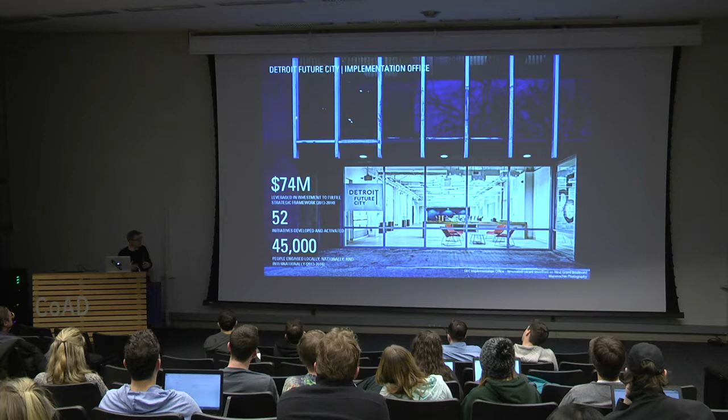I think for us, we have operating funding from the Kresge Foundation. We work hard with a number of other foundations, as I know some of you do, to garner additional funding to implement programs. But what we try to do is really step into the breach where you see challenges on the ground in Detroit, and the opportunities that are there for the city, and sometimes they don't necessarily connect, and we try to come into that point to connect them and to really catalyze things that might not otherwise happen.

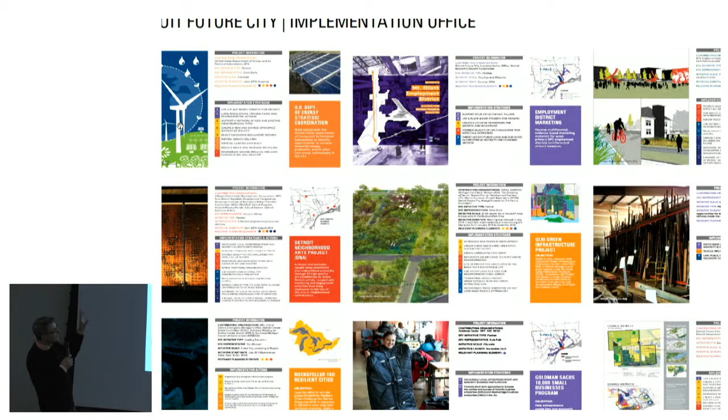We do that in a number of ways, and this is a little postage stamp of some of the initiatives we've done. They're different things - planning and pursuing EPA grants, coordination with the Department of Energy, economic development planning, working to bring in investors into Detroit to support groups. You recognize Veronika Scott here - a whole host of things that all stitch together.

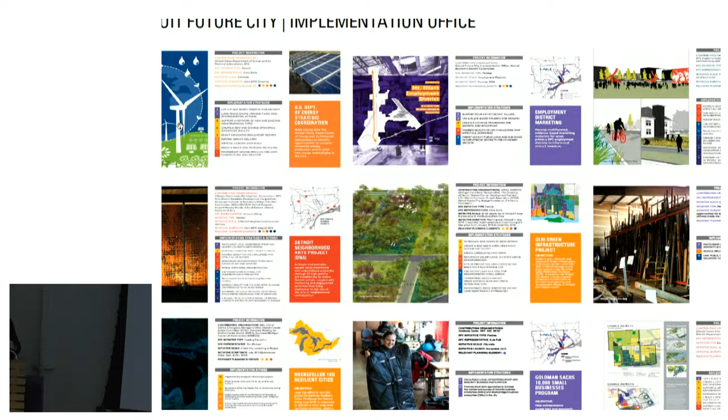And they sometimes step way out of bounds for what people think we should be doing, including ourselves sometimes. But I think our team is quite earnest in trying to move the city forward, and sometimes that means you make mistakes. I think we're learning along the way, and I feel very good about what we've been able to do. So before we go there, I'd like to back up.

Sometimes I go to places and present an entire slide deck that's all Detroit Future City, and when I leave, people think I'm a planner, which at some level is okay. But I think that distinction is troublesome for me, because as architects we've become somewhat set aside, procured for a very specific technical task, and that task is becoming increasingly specialized. I think it puts us in a position to have far less agency around the key issues impacting our lives and our cities.

I'm advocating for, and want to demonstrate in this presentation, perhaps not the most robust intellectual project, but one that is highly discursive and moves across different terrains and boundaries. You don't have to ask for permission to step into a space you normally wouldn't be in, you just go there. So some of the stuff I'm going to show you illustrates my background, which as an architect is doing buildings.

This was a building I did, actually the construction was completed right during the midpoint of Detroit Future City, so these two things were going simultaneously. For me that was exhilarating, that's what I absolutely love to do, having these very different things happening at one time. I think for a lot of people it's very troubling because they don't know what to make of you, and I find that fun.

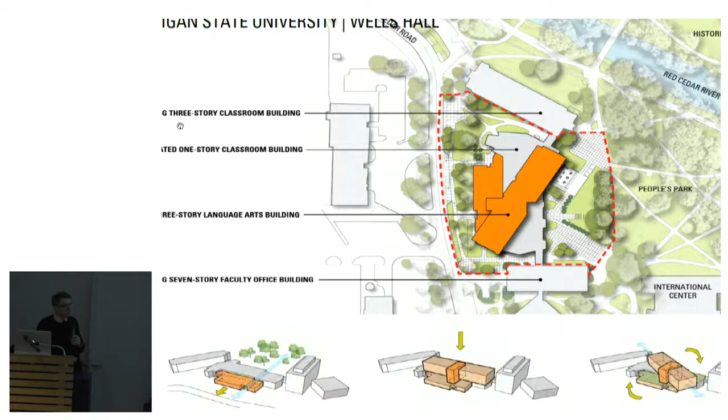None of these are intended to knock you down, but the idea is, we went through this process to do this building for Michigan State, a linguistics building for them. It was there to redefine a place called Wells Hall, a kind of Eastern Bloc looking building along Shaw Lane, the front door to the university facing the stadium. They really wanted to reposition it and introduce the university to people as they came through, so we had a whole host of different ways we approached it.

We ended up doing something the leadership wanted, which was essentially placing three additional floors across a series of lecture halls like these at a 31-degree angle, because it would be perpendicular to the northernmost building. For the leadership that was important, and we understood that. This is after about a year of figuring out exactly where all this stuff goes. It also preserved People's Park toward the east along the Red Cedar River.

When we did that, it meant this massive building, about 88,000 square feet above the lecture halls, needed support, so we had to come up with an innovative structural system because you couldn't put any columns in a sight line. Imagine that size building running across a building full of these rooms and not being able to block any of your views. This was a really huge challenge.

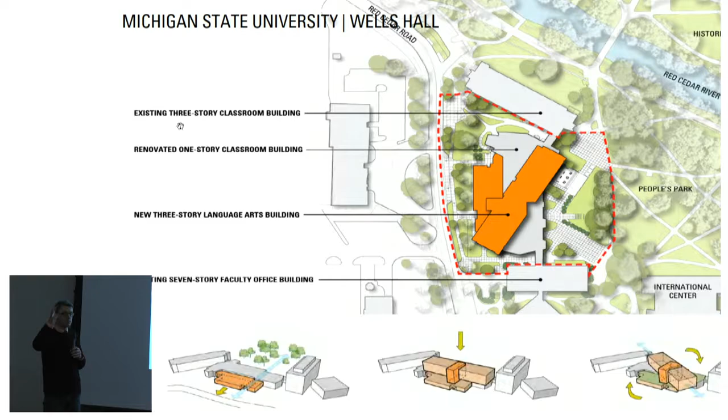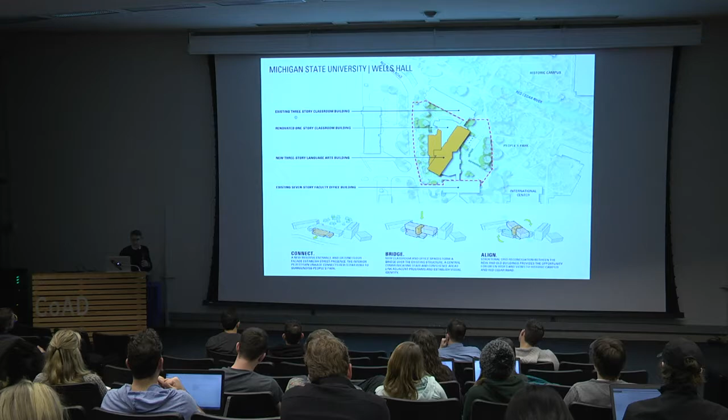We ended up developing a different braced frame system to do this. But the point I'm making here is not so much about how awesome the braced frame system was, but the fact that you can do that and help plan a city at the same time. There are ways to do this, and I think when you bring these things together, some pretty cool things can happen. So this is part of that framework, maybe in the earlier third of Detroit Future City.

The idea with this building was also a radical departure from the way the university had done their faculty offices in the past. It was all open seating because they were dealing with some really tough numbers in how to manage space, and we were shifting people. This was kind of like the last domino of a 25-set domino run across the university to move programming around, and this was the terminus point that allowed all those other things to happen.

This meant we were bringing faculty into the space, and I can tell you many were very, very frustrated at the fact they wouldn't have a private office anymore.

We went through meetings when we'd bring people in here, and we'd actually show them how the shades go up and down with the sun, and when you look out you see all over the Red Cedar River. Immediately when people saw that, they realized, whoa, this is incredible. Not only do I get to see outside to the river, but I can turn around and talk to my coworkers quite easily.

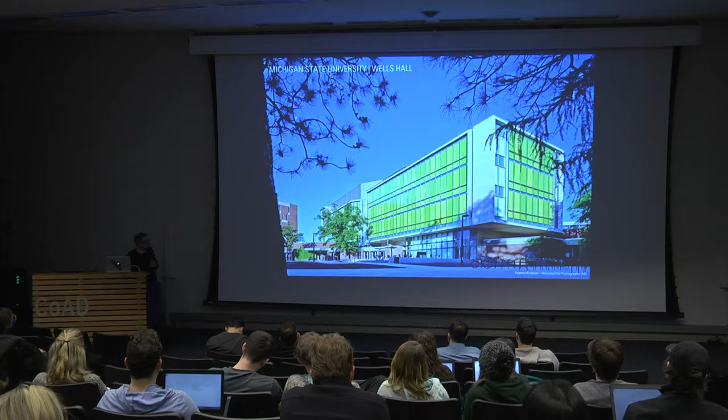What we're understanding now from post-occupancy studies is that the kind of communal atmosphere in here is pretty contagious, and they want to do more of this across the university. So those are the shades down.

Part of the work I've done is also just kind of right on the ground, bare knuckle stuff. This is in a city that has a lot more notoriety these days, Flint. This was a project I did a few years before the one I just showed you, working with the local mass transit provider that actually has some of the highest ridership in Southeast Michigan as a percentage of population, much higher than DDOT.

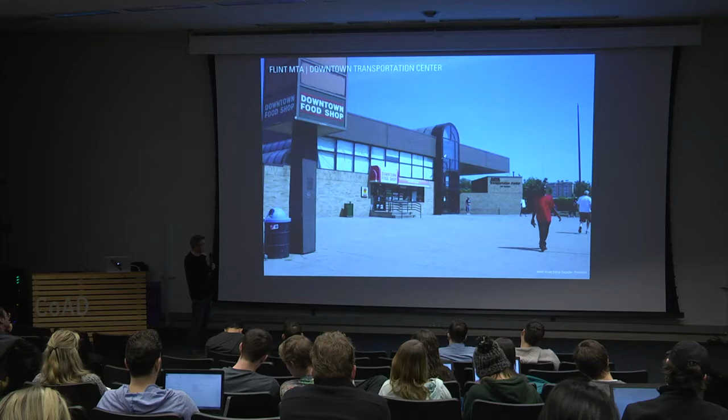We worked with the group to really re-envision the whole thing. The idea was that we have to celebrate this kind of public infrastructure. This is in the heart of downtown. It could actually be a huge progenitor for new investment, not seen as like, oh, the old bus terminal, man, okay, we can't go there. What could it be?

So what we did was we completely stripped it down, taking away all those opaque surfaces, and opened it up with tons of glass. And so we raised it up. Once you strip it all away, it has this kind of Miesian plinth to it, it just floats.

These really slender columns run along and zigzag in and out for the buses, because there's a sawtooth every time the buses come in. They park in a sawtooth fashion on either side. We just blew out all the walls and put glass in, cleaned it up, and did it quite inexpensively. I think we came in slightly under budget.

I felt really good about this project because it had some strong design components with a really limited budget, and it celebrated something that a lot of people quite honestly just try to hide. It made it worthy of going to, so families could be there and you could walk and feel safe. Before, I don't think that many folks could.

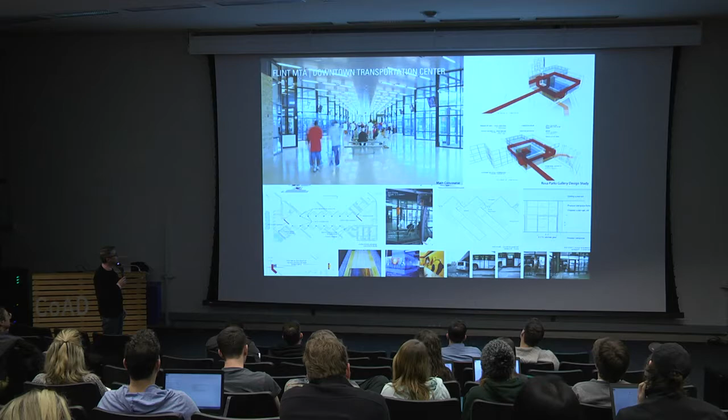So this is all the light that's let in. I don't have a before shot for you, but it was quite a bit darker, and you couldn't see out that other end either. So that kind of blows out, and you actually see the historic facades across the street there.

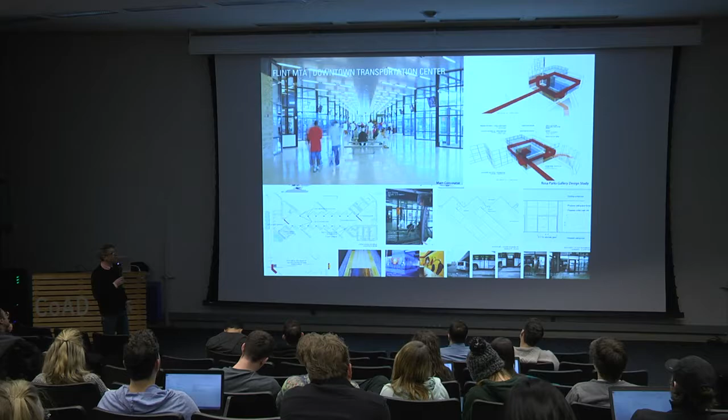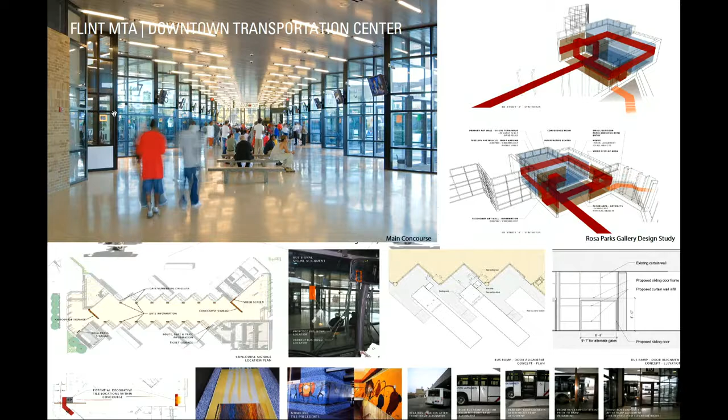In working with the client around these circulation studies, probably to a degree which I didn't need to do for a bus terminal, to be honest, but it got them excited about how they could reappropriate this space that was for offices into this new Rosa Parks little museum space, and how the common patron could come in and tour it very quickly and go catch a bus, so it wasn't something people would get stuck in. That was a neat exercise too, to get them fired up about it.

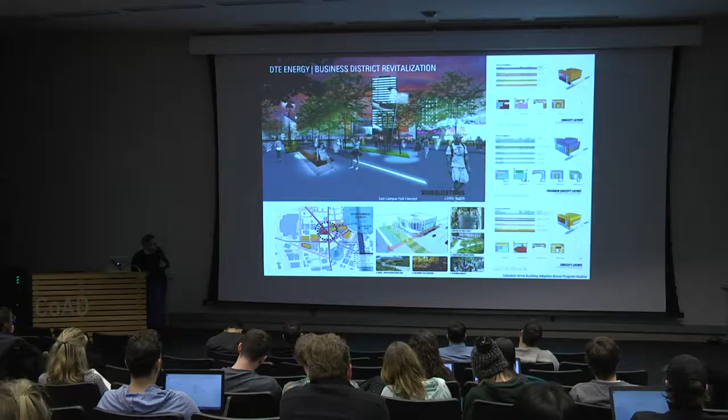There's other things I've done too along the way, working a lot with DTE over a number of years. Some buildings, actually saving this building right here, the Salvation Army building on Bagley, if you're familiar with that one. Really feel good about this one as well. The office I left, Hamilton Anderson, ended up doing that work, and it was great to save it. It actually frames a big part of that part of downtown, which needs a great deal of framing.

But now there's huge struggles because the economy's pivoting. Spaces are getting more costly, and a whole host of things, and we were working with them to identify ways in which they could use some of the land that they own as revenue generation that could support their programs, which are really important programs for youth across the city, really across all of Wayne County.

And I think along the way, we've done a number of other things. This is some work I did with Pewabic, and I show this slide. I don't actually show any of the design work because, to me, these program diagrams are things that I do when I get into projects. When we come in, the way that I always approach it is at a very evidence-based level.

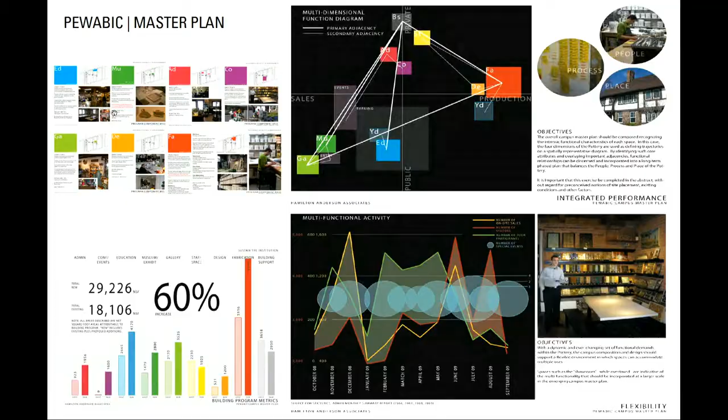So we would analyze all, this is true of all the projects you've seen so far, but this is an illustration here. We worked with Pewabic, who has very, if you're familiar with Pewabic pottery in Detroit, I'm sure many of you are. It's a very tiny historic space, very cool, but very difficult to have multiple programs in at one time. What we did was these studies to figure out what the ebb and flow was of different programs over time and how to position these things differently so that the expansion they were imagining could be much smaller than it was. You could preserve the identity of it, and create much more refined, intimate spaces that are really the kind of feel of what that place was.

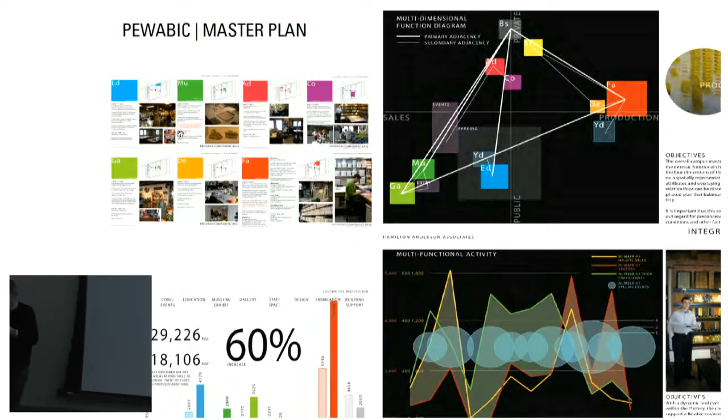And that led to some interesting work down the road with them too. There are other things along the way that stretch outside.

Around the same time, I was doing some competition work with the World Bank. This was actually to land a new Supreme Court cassation court in Armenia. These are some of the former Soviet republics, in the Caucasus region. There are many of these that were kind of opening up, and they didn't have the basic infrastructure in place. When we saw this come through, we went after it, and I was really excited because to me this is also the real role of architecture, right?

The way to kind of step into an environment, clearly an urban space in Yerevan, one that has suffered mightily from an oppressive regime over a very long period of time, and where the actual core judicial infrastructure was not present.

In fact, when we put all this work together, we did this within 2 weeks. You guys know Claudia Wigger, right? Do you know her? Anyway, so there's a woman that we hired at the brink of this project.

She was about 8 months pregnant, and we worked on this for 2 weeks, and she stayed with me until midnight every single night, working until her husband pulled her away, because we both felt so passionate about this project. We got it out, we landed on the ground, we had a partner on the ground in Yerevan.

They took it over to the local emissary that was going to do the processing. We got the call the next day. They said, 'Man, we just missed the deadline. I can't believe it.' And I'm like, I really can't believe it. I'm going to jump through the phone and get you over there.

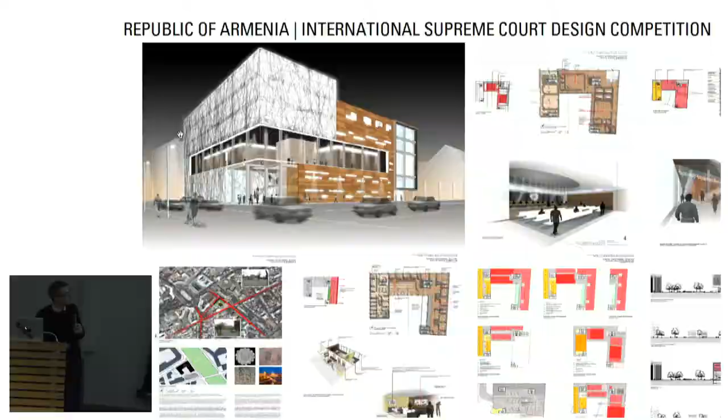Anyway, this project did not go forward, or at least for us. So this was another one that I did, though. This is actually before I got back to Detroit. This was when I was in New York working at SOM.

This was around 2002, 3, and 4, their new president, Lee Bollinger from University of Michigan, was recognizing that they were the school with the least amount of total gross square footage per student of all the Ivy League schools, and that they were really suffering. They had a premium on their space, they couldn't expand into different programs, and they really were missing huge, what they call indirect cost recoverables for research facilities.

Very different worlds. Columbia has a very contested relationship with the community, particularly as you get deeper into Harlem, particularly West Harlem.

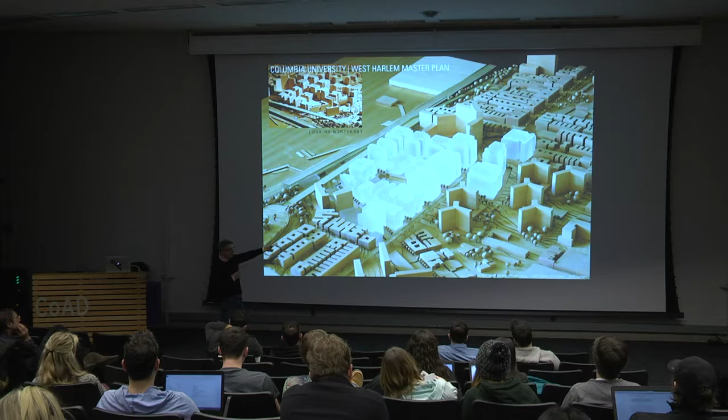So what had existed here before was kind of nothing. It was a bunch of chop shops and illegal auto repair and some old slaughterhouses. If you're familiar with the area, the Fairway Market is right up around the corner here, which is a great grocery store along the Hudson. It was a kind of really crappy property. It was depressed, like, not literally down, but very close to the water line, the Hudson.

It was surrounded by all of these viaducts and trains. You have the 1 and 2 line here, the Metro North line, the 12th Avenue viaduct, and Riverside. If you're like a Law and Order murder scene, you're usually shot under this viaduct. It's a really interesting place, and your teeth want to rattle out of your head when you're walking because the train, the 1 and 2, comes out of the ground right about here. It'll literally shake you to death.

What's interesting is this site was identified because it had available space, and again, we wanted to put science labs here for research facilities. These research facilities ended up having requirements about so many microns of movement per second that we had to isolate, and this thing wants to knock you down when you're just walking. It was an incredible challenge technically and politically.

And the technical dimension of it got even deeper because we were trying to figure out how to deal with that shaking, but also what we realized was that we ended up finding basically the Manhattanville Fault in northern Manhattan.

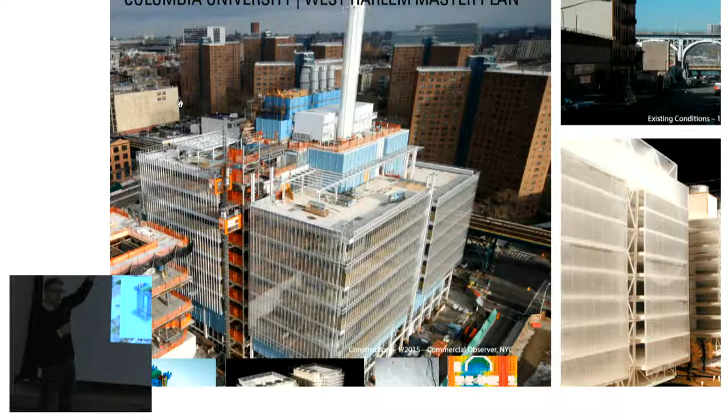So what happens is toward the north, there's rock outcroppings, and they build homes up on the rock, they climb up. Then you go down to the south, it happens again, you go up to like Grant's Tomb and Riverside Park and all that stuff. So if you're familiar, there's like these big things, and this all dips down. What we found was this isn't just this little dip, there's like nothing down there, just kind of fill over time.

We did soil borings, and from plus 20 above grade, down to 0, negative 20, it went down to 200, and we couldn't bore anymore, they fell off. So it meant that now we not only had this technical problem with the shaking, but we also didn't have a foundation. We didn't have bedrock to lock down to, and that's why in lower Manhattan and midtown Manhattan, the buildings are taller.

It wasn't just somebody who decided to build tall buildings there. That's actually where the bedrock is closest to the surface, so it's cheaper. Here, it was very expensive, very, very expensive.

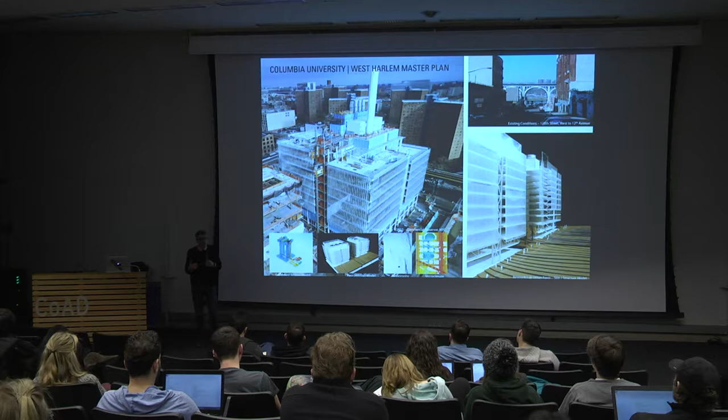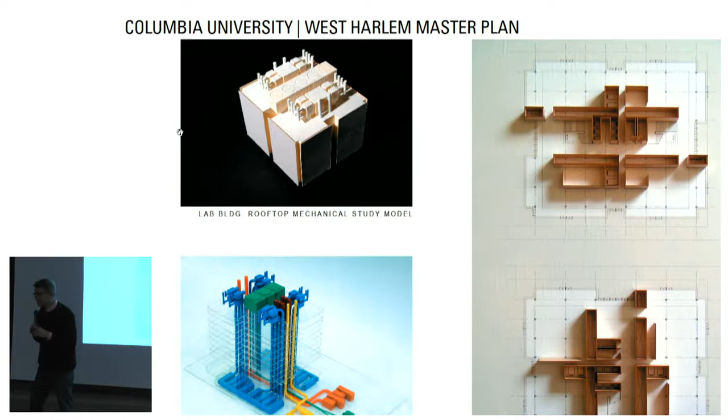This process really taught me a lot about how you integrate really intricate systems, and we took a lot of time. These are models that I built, figuring out how these systems could flow through these lab buildings and how they could connect to a bigger system overall.

We worked on a lot of this with Renzo's team. We were back and forth between Paris and New York every other week, which sounds super awesome and exotic, but it's really rough when you're loading a 747 at 6 o'clock in the morning at Charles de Gaulle to come back and present later that day. You just do that again and again.

But that project went forward, and in the end, some of the things that came out were just really amazing. I think the way that Columbia was able to foster a relationship with the community in a way it hadn't before was quite rewarding.

There are other things that I've done here that I think are indicative of someone working who's also kind of struggling to find their way.

Of course, I did a number of large-scale projects with SOM in China, as anyone would imagine one would do. Over time, they're huge—I didn't deal with anything that was less than 1 million square feet. I don't know that they're entirely the most responsible things to be working on. I look back on that time with a little uncertainty, but they were exciting for sure.

We were testing some pretty interesting things, like active LED skins that also had photovoltaics in them that could generate power to actually run the skins at night, which is super cool.

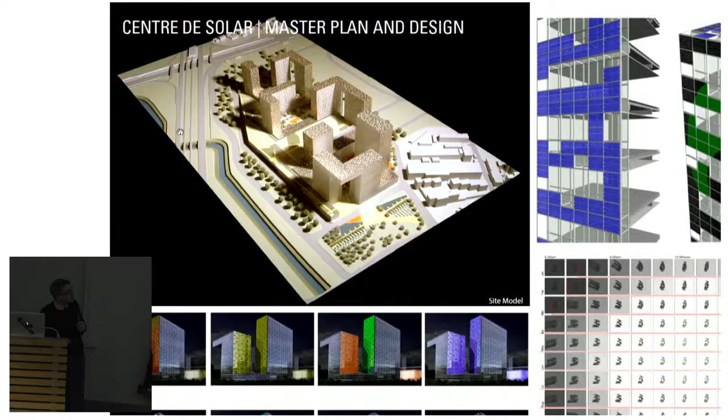This one is around the 3rd Ring Road, northwest side of Beijing. Some interesting things were happening in this project, but I show it just to say these are some of the things we do that sometimes maybe we'd like to do a little differently in the future.

Another end of the work I've done, which starts to lead more into the work I do on the ground in Detroit right now, was starting a group at HAA called Rogue HAA. We started an internal design group to gin up design ideas within the firm. Melissa Dittmer and a handful of others really worked with me on this, and Melissa moved Rogue HAA forward and externalized it.

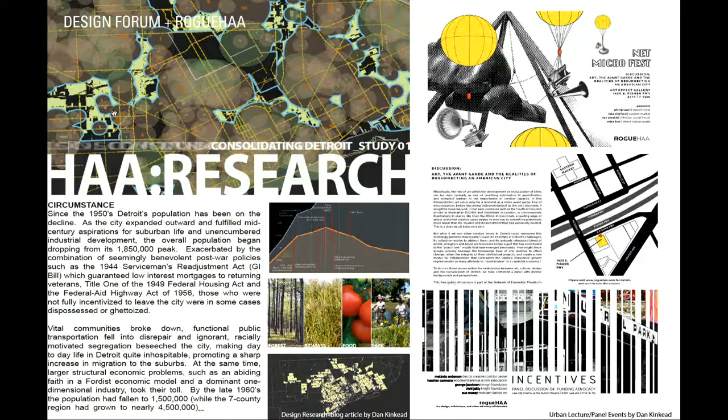We did a lot of research in the city early on in a way that other people really weren't at the time, certainly not through conventional practice. We would do this stuff at night, write things up, put them out on the blog, and run events—like one I led with all the local leads for the national philanthropic entities, understanding what they were doing in the city, and a whole host of other things.

We had a number of different events, some really cool installations along the way, and I think this is also part of architectural practice that a lot of people don't get to. It's a beast because you've got billable work and all these other things you have to do, but these things end up being not only the most rewarding, but the things from which I learned the most, and have certainly informed the way I approach my work now.

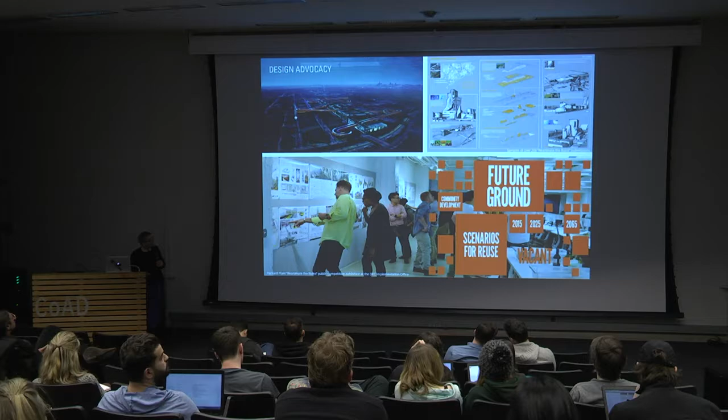There are other things I've gotten into over time—I'll talk more about this later—like a large-scale design competition we coordinated with another group out in New York for the Packard plant. This has actually led to a lot of interesting design research on adaptive reuse for industrial buildings, and I'm really excited about this work and look forward to sharing more with you.

I think this is another thing I've really had the opportunity to do in the last couple of years, which is also important for us as architects: to be present in conversations we're typically not part of, like talking at a policy conference about the relationship between design and race, and how we design cities better, recognizing the precarious position our country is in from an infrastructure perspective.

This conversation at Brookings was just on that, understanding how we work together with policy leaders and engineers to completely restructure the infrastructure that we have. Just before this, when we were up here on stage, there was a senior House member, I think from Maryland, talking about foreign direct investment, but also all the American firms holding their capital offshore so we can't draw taxes off of it.

That very day it was amazing, there was pouring rain in DC, and I made the point that without the ability to bring in new investment to separate these systems, the combined sewer systems we have, all of that stuff rushes through and goes out into the tidal basin, the Potomac, and other places.

In Detroit, it's the same thing. When you get a little more than half an inch of rain in less than an hour, it all combines and surges through our system, taking all the raw human waste with it, typically unprocessed at that point, and gets pushed out into, in our case, the Detroit River.

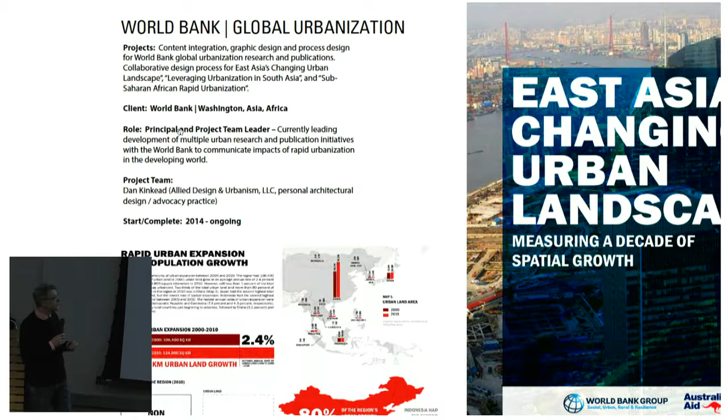What we were understanding is that there are real challenges coming. You have areas that are rapidly urbanizing. In Detroit, we talk about these huge challenges, the city emptying people out, right? Depopulating, disinvestment, all of these things.

But in other parts of the world, places like China, toward the Pacific Rim, or particularly South Asia, there's rapid urbanization with very limited resources, and the numbers we're seeing there are really quite stark. They don't bode well for us globally, and they really indicate that millions upon millions of people are going to be suffering. They're suffering today, and they'll suffer in the future, and we have to figure out how to deal with this.

At one level, working on this with the World Bank is to figure out what to do and how to express this to leaders on the ground in, say, China or wherever. But the reality for me is understanding how do we, as architects and designers, figure out our role in this, because it's not considered in the World Bank's work.

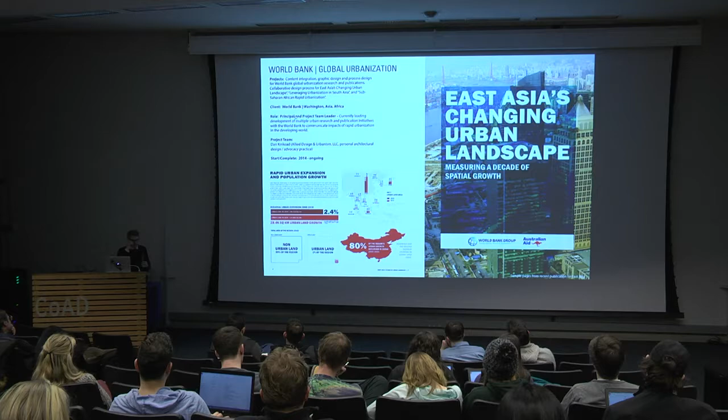Where do we step in here? What can we do to help? We think about how important these areas are, and how they do make up really the dominant part of our global economy. We can't really afford to have them fail.

This is extended into some work that we've done now in South Asia. This is our most recent work, and doing these kind of documents, they can get to people on the ground when they host events, but then also how they can do these quick releases of information so people get a snapshot of what's happening very fast to understand what the challenges are. This also helps them coordinate with other global partners.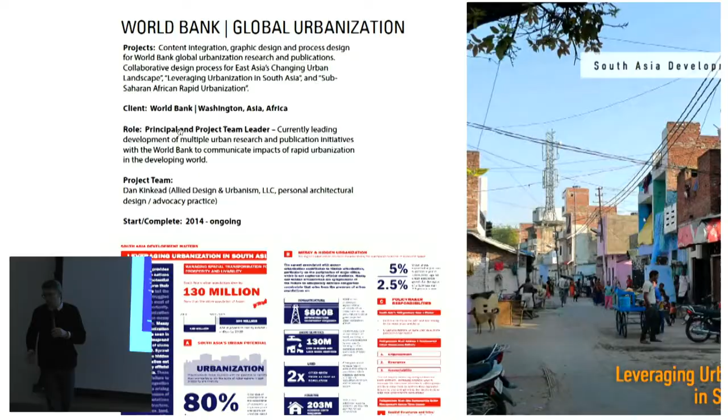In this work, what we're realizing is that as these areas grow, and this shot is composed purposefully, they're getting choked off very quickly. So you're seeing this rapid surge, particularly in South Asia, but the infrastructure isn't present to actually move it forward. And so all of a sudden you hit a real limit, right?

The transportation systems aren't there for people to get to work. The childcare systems to support the families aren't there. And you really start to struggle all the way down to just even how you develop agglomerating economies and how you get people to work.

This shot from Bangladesh, this is how a lot of people are getting to work. It's not safe, but this is today. So what's next year and what's the year after that as this population essentially mushrooms? It's not going to work. You're going to have real calamity here, and that calamity is going to come back to us in a lot of ways.

And quite honestly, even if it doesn't, it's still I think our obligation to do what we can to help. There's some other work that we've been doing with some preliminary stuff in Africa. This stuff has stopped, but I'll let you kind of read these stats up here. These are also startling. And so when I look at it, I'm again helping them with these packages, but I'm also just taken aback by this.

What can we do as architects, as designers, to help step in here? Because clearly this isn't just about providing money. It's not just about making sure programs are in place. This is about physical infrastructure. It's about the spaces in which people interact and how their economies function.

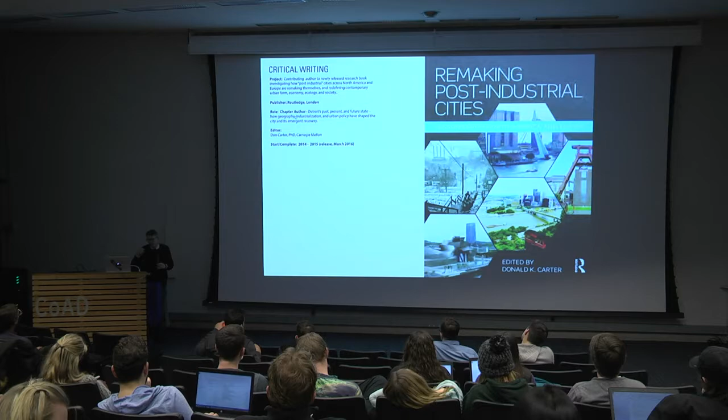And I think the lessons that come out of this are really quite powerful, and they actually relate back to some of that World Bank stuff. I just think, as architects, we need to be in this world too. It's not just about doing a building or doing an interior, but it's about really stretching and contributing to this kind of dialogue. So clearly, this is about transcending convention.

It's about moving beyond those kind of barriers. I think it's important not just to do those things for the kind of merit that I'm laying out, but also because of what I call the chain. This is the chain of decision-making generally that you see in a project, from top to bottom.

There's a process that goes: maybe a market thing, regulatory change, whatever happens. Board of directors meets, they tell the CEO what they want, committee happens, the real estate deal gets cut, all the way down. They go out, they actually RFQ for a master plan, do the master plan, and then maybe a couple years later, there's a capital plan that's developed, then they get some financing in place, they get a project team, they build up everything else, do an RFQ, then do an RFP, and then there you are.

And I think the way that we get back up there is through some of the stuff that I've shown you. I don't claim that it's everything, but I feel that it's some way to get there, and it's not through some kind of big takeover, but rather through the merit of the work.

And as we do it, when we get back up there, we do it in concert with the public, with stakeholders, with the people for whom this work matters most. It's not just about us taking autocratic action, but understanding what the public's looking for, what users are looking for, what these guys may be missing. We can be that linkage. We can challenge folks, bring research, advocacy, all this insight, and honestly, to do it, we have to take risk.

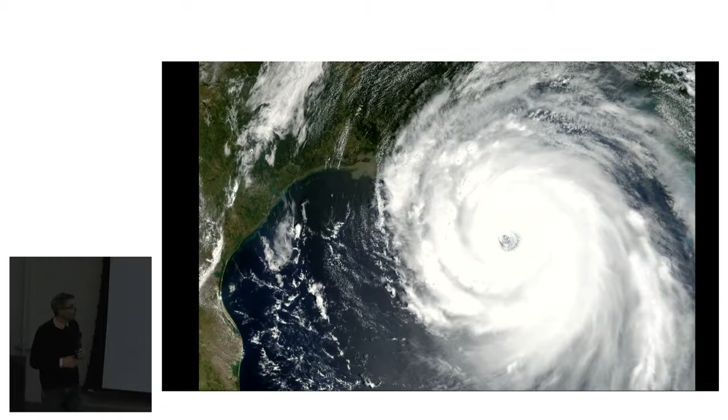So the big idea here is that doing these things gets us in a better position to deal with the challenges coming at us. And they're a little bit more than even what I just laid out. These are challenges, and I think they also yield opportunities. They better yield opportunities, or just forget about it, because they're huge, like the storm which was Katrina.

And I think after Katrina hit, there was a moment of insertion of architecture, of thinking about design, and about space, and about urban economy and race, all together at the same time, which was really important. Brad Pitt was there, some stuff happened. We designed some stuff down there and did some competitions. But at the end of the day, how much changed?

I think that's questionable. And what happened overall from a socioeconomic perspective, what do we do going forward? It seems like these things are happening more and more often. So where are we in this? Where are we here in Ferguson? Where are we both at the front end, and where are we at the back end?

Is there a role here? Is there a way for us to be a participant in a new kind of civic exchange that we have to have, that's going to impact all of us? And we have to understand that for some of us, like myself, we come from a position of privilege. I come from a position of white privilege that I can't possibly comprehend. And I think we all, at some level, no matter where we're from, have to understand our position here and what that means.

The work I've done with Detroit Future City has taught me that time and time again, and we have to understand it. This isn't necessarily part of practice, it's part of the way we think. It's about empathy, and it's about understanding that some things are not okay. Because if your kid was living here, no, it wouldn't be okay.

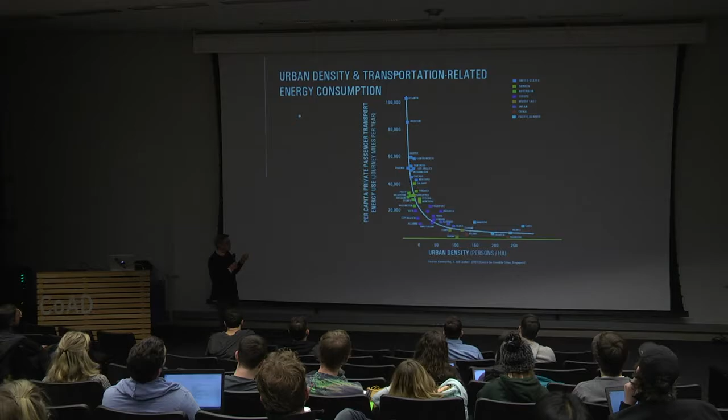A lot of folks are trying to find that kind of balance point—where we need to be, what's truly sustainable. And the fact that urbanized areas are growing so fast, we think this is the place to do this. How do we step in as architects and designers and work with planners and others and politicians to figure out how we get this moving along more quickly than we are? Because all that stuff I shared with you, as I'm talking, those hockey stick diagrams are still shooting up. So how do we step in here?

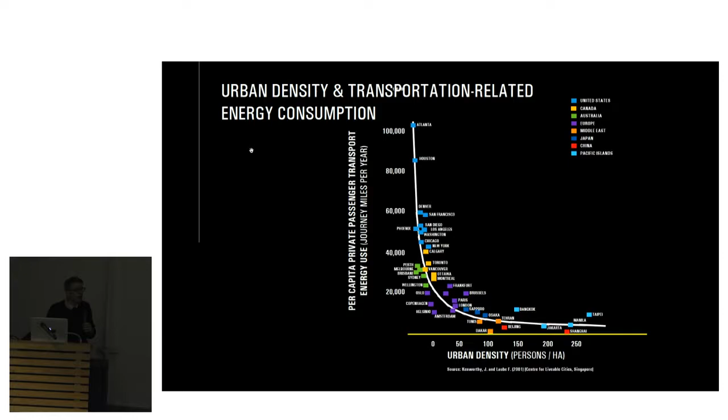It goes beyond—you look at that slide and think about the thing I showed you about Michigan State University, and at some level I actually start to question the relevance of that stuff. This is a place where we need to be.

As we think about more cities, more urbanized areas, higher density—yeah, this is good. At the same time, we also have to realize there are real challenges here, because there are huge wealth disparities in our country, huge wealth disparities globally, certainly. But we also have to understand that as we think more about an urbanized area, you think about concentrations of wealth, you think about concentrations of poverty. How do we work together to actually eradicate those things?

And what are the ways in which design can actually mediate in a space that sometimes the political dimension really struggles? So therefore, I think that cities are the place to act.

These are some stats pulled together by our partners at Metabolic, which I think are really important. Cities today are 3% of our global land area. They produce 80% of our global GDP. They're responsible for 90% of the innovation we track. They produce 50% of the global waste.

And they consume 70% of the natural resources and account for 80% of our global greenhouse gas production. So on one level, these are places for huge positive intervention, but they're also a place to begin to mitigate some of the negative externalities. Because if you can get in here, the one square mile of area you cover may have a much more profound impact than the one square mile you cover somewhere else. So if you're pressed for time, which I'd argue we are, and pressed for money, which I'd say we are as well, maybe these are the spaces we really need to focus on.

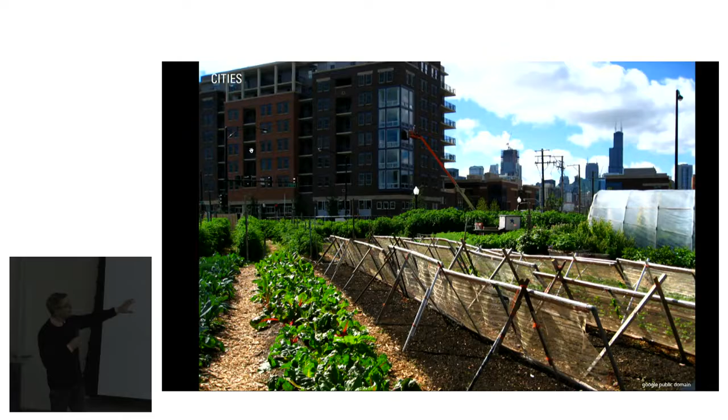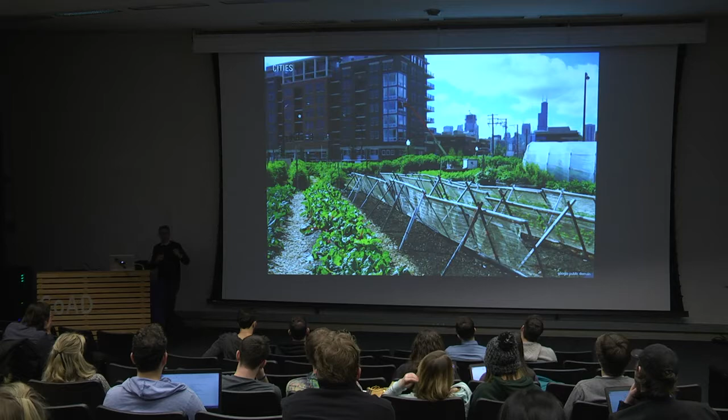So in that space is where we tend to operate for Detroit Future City. I'm not telling you we suddenly have all the answers, but we try really hard. We get our heads beat in regularly as we do it, but we keep going, and we have some people that really love us along the way. At least from what I can tell, you only live once—if you're going to do it, go for it. You don't know how long it's going to last, so see what you can do.

So we tend to focus in certain areas—there's a spatial reality to how you do this. It's not just everywhere. It means if we're going to focus growth in a city like Detroit, where do we make it count? Where does it support the systems that are so expensive, that are going to drive our economy, that are going to get more Detroiters employed? Because today, for every 4 Detroiters, we only have 1 private sector job.

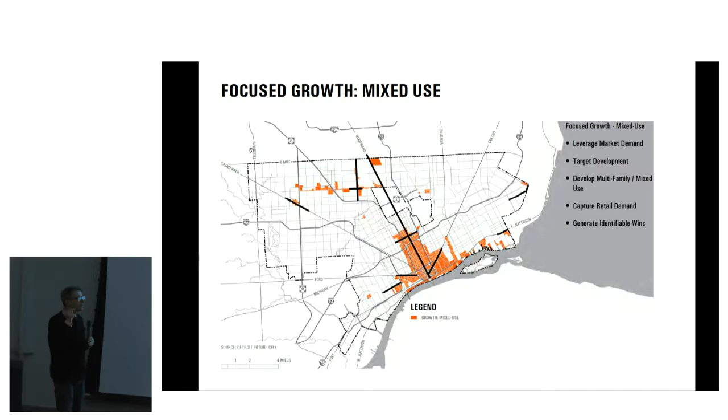Most American cities, like an even-handed city such as Philadelphia, are about 2.5 to 1. We are way out of bounds. And so if we're going to be a contributor on that global scale, we've got to get more folks employed. We've got to get folks access to health amenities and services, activate our corridors. It's not everywhere—you can't start everywhere, but where do you start to really build up? And how do you have small scale efforts across the city overall?

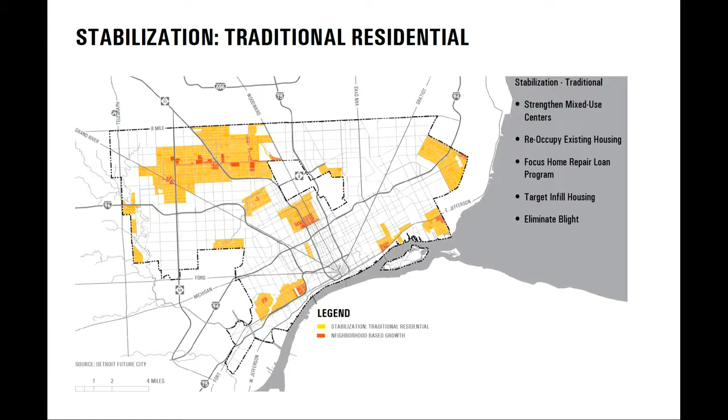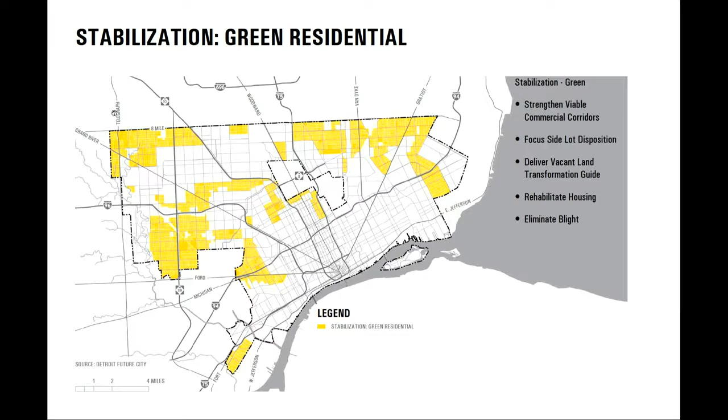How do you anchor major areas that need some stability, the areas that pay the vast majority of the property tax that supports the city of Detroit, that expands out into residential neighborhoods at medium degrees of density and vacancy, 30% land vacancy in these areas, but these areas also have the highest concentrations of kids and elderly. So you've got vulnerable populations here.

How do we understand that in areas with really high degrees of land vacancy, people are going to live there in perpetuity, but we have to think about different types of land uses on the ground. We think there can be big open space systems that can do things really differently and improve things on the ground. All of that comes together to deliver something we think is a unique value proposition.

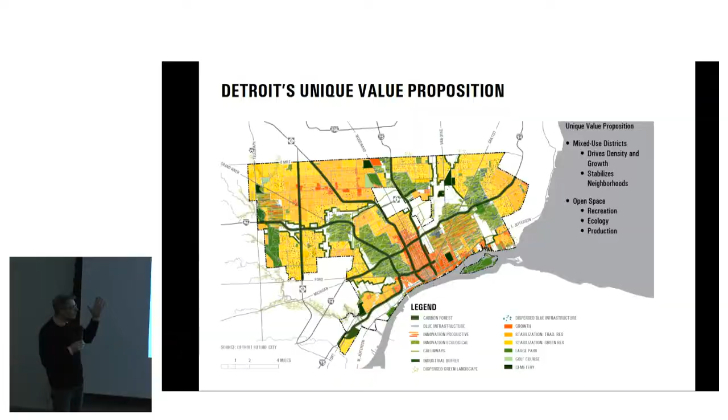To have dense nodes of density, to live a kind of urbanized life, to have access to open space. Open space, by the way, that we show as a percentage of the total area of the city, which is just smaller than the total open space that the city of New York holds across all five boroughs. Sometimes when we show that map, people are like, oh my, no way, no city can function with all that open land.

They can, and in the case of New York, of course, they have a robust economy to support it. All those spaces cost them money. In this case, some of the spaces we show will actually generate revenue. They'll generate jobs as well. So these things can all be woven in together.

By the way, you see those green little lines—those are buffering us from the industrial spaces, because we have the space to do it, and our kids have three times the rate of childhood asthma than the national average, so we might want to do it. So the public interest is a big, big part of this.

I'm going to click through those three projects I highlighted before. So, HUD resilience: in August of 2014, if you recall, if your car was not floating somewhere—many of my neighbors' cars were floating—we had all this happen, which I'll let you read. Really bad stuff. It's going to happen again, and it may happen again and again and again. If you saw the hockey stick diagram, there's an exponent function here. Things are changing. How do we get prepared for it?

How do we do that when we know we don't have $5 billion in money lying around to dump into huge concrete infrastructure systems? And by the way, when we also know we have all this vacant land in and around Detroit, how do we deal with this and make sure we can actually preserve people's quality of life?

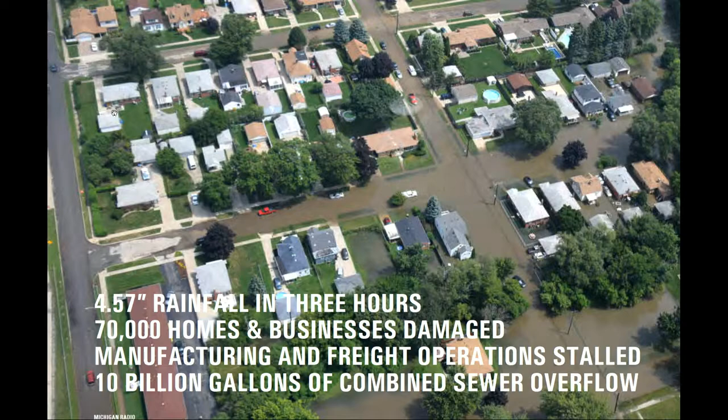So this isn't New Orleans, this is us—I think this is like Warren or something. This is us, on some day in August. Could be next August again. How do we take those open spaces we have to begin to mitigate things like this and save this kind of stuff from happening, and the deep impact on the city?

For us, one of the things we've worked on in the course of really 2015, with one guy on our team, Chris Dorley, really drove this work. Working hand in hand with the city, we helped to define a resilience program, a package that we could share with the U.S. Department of Housing and Urban Development, HUD, to garner $8.9 million in community development block grant money.

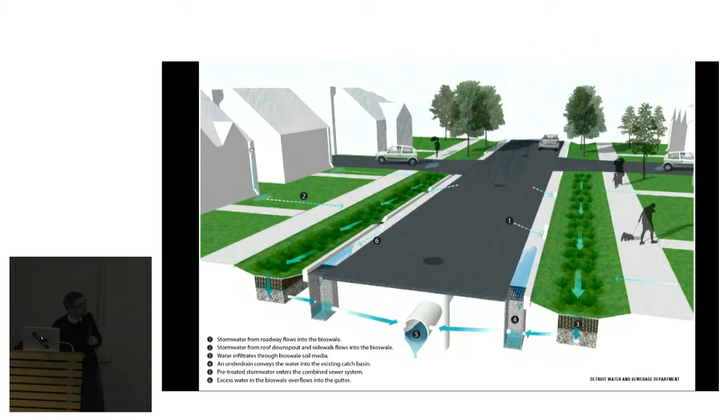This was discretionary funds, because we didn't actually qualify for the presidentially declared emergency, which is kind of like bonus money in a way. We were able to bring this money in to really think differently about how we run these systems in the future—to help clean up people's basements, to think about renewable energy, to think about a host of things that we're not typically able to do. These are things that we do at Detroit Future City. Again, it's not your conventional practice, but I think it's important that we contribute in a way that can help move this stuff forward.

So a very basic design that you guys know for managing stormwater could be incorporated, and it's part of the process. Part of it also links to our open space network. So this is a nice way of describing that, right? This is an average shot of the inner portion of the city. This area happens to be suffering from about 65 to 70% overall land vacancy.

At a certain level, you could say this is fine. It is, but everything that's there still costs all the money that it ever did—all the police runs, the fire runs, the water, the power, the sewer, and so forth. In many cases, we're paying into that big time, and we're not getting the kind of services in the back end that we need. So how do we begin to re-envision these spaces and make them work for us?

This is about 23.5 square miles today. We do this in a number of ways to get at this issue through research, activating programs, thinking about these things from a recreational side to productive and ecological ends. We see the vacant land in the city actually exponentially growing, because as we're working hard to eliminate blight in the city—a big effort for the mayor, which is important—living next to blight is not good. It's still an issue: how do you begin to actually remove that? When you do remove it, you'll end up with about 30 square miles of vacant land. This is a little bit larger than the island of Manhattan.

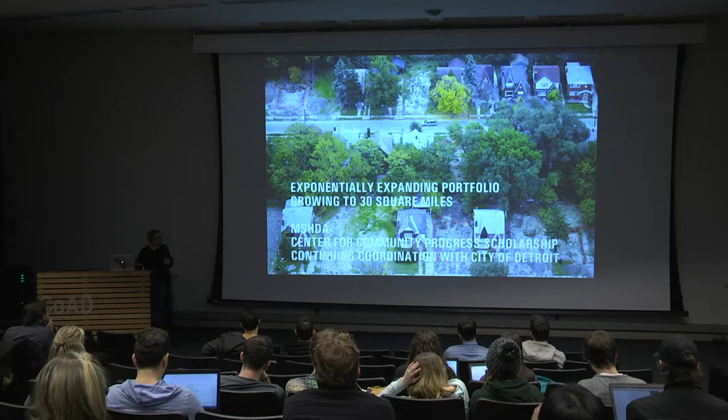At the same time, we're trying to figure out how we can work with partners like MSHDA and CCP to advance certain programs on the ground. I know right now the city is looking closely at these types of things as well. So for us, it's about improving quality of life—systems, food, energy, all of this stuff working together. It happens in a big, crazy scale on big policy documents, things we work on with the Center for Community Progress. Dara O'Byrne is leading a lot of this work for us. These are the nuts and bolts and really high-level thinking you need to understand how all of that vacant land can turn into something that sustains the city, stabilizes it, provides jobs and recreation, and actually cleans our air and likely reduces our heat island effect considerably.

One of the ways we think we can get there is through a really hands-on tactical tool, developed by Erin Kelly on our team, and there's a host of folks with her actually working to implement it. This is a field guide for working with lots. Basically, it's a hands-on guide for Detroiters to use as we try to understand what we can do with the vacant property around us, particularly the vacant side lot that we might own or might have just picked up from the Detroit Land Bank Authority.

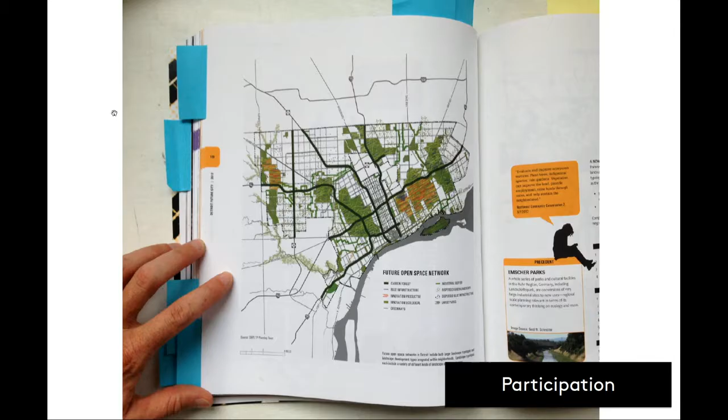What do you do with it? Because you pick it up, that's great—okay, what's next? So this guide really steps in, and the way we developed it was so you could use it with your neighbors to actually develop the concept together, procure the services, or work on it yourself. These are not the usual workers walking around, as you can tell, but figure out how to actually do something on the ground, using the work I've shown you so far in the field guide, laying out the 34 different lot designs we developed. These were also done with a host of other folks who helped us out—the work department, Hamilton Anderson Associates, a fleet of folks that made this happen.

We don't do these things by ourselves. A website was developed also so you can gain access to figure out what you need to do. All of it tells you how much it might cost, how long it takes, the expertise you need, et cetera. And then we can also step in to provide technical assistance.

So this is the guide itself and what it lays out—this idea around discover your lot, what could it be. It really builds on the framework, and then this kind of hands-on thing, how you sketch on the document—something for us in the design world we take for granted, but for an average Detroiter, they're not usually thinking in these spatial ways. It was really interesting to go in and figure out how to have people understand where the sun is and where the wind comes, when in the morning, where's the shadow, and things like that.

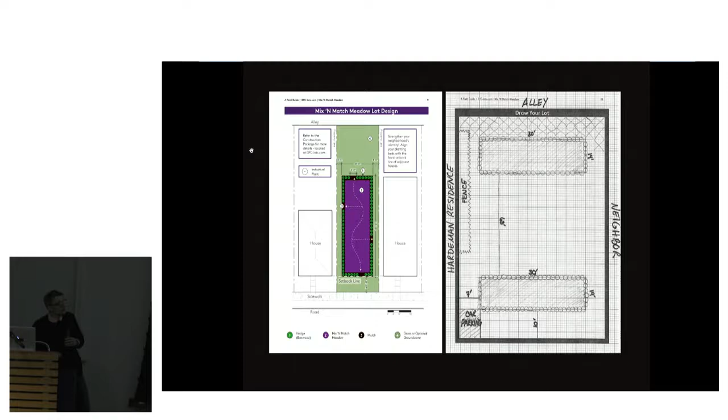But we're really excited about it, and some of the pilot projects we ran last fall started up. These are some shots from community members coming together. In this case, it's Black Family Development working in the Osborn neighborhood on the northeast side, coming and cleaning up a lot, getting it prepared, and then actually leaving the work behind. It just demonstrates what's possible at a really grassroots level when people are given the opportunity to do something like this. We're really excited about this process, and it's moving forward.

We just launched our mini grant program. We've got, I think, 15 groups that were awarded. Those projects will be moving forward in the spring.

So as we do that, we know we have to begin to think about this innovative future. We've got to figure out how we can actually coordinate all this stuff together, form this network, and make sure people understand the value proposition overall to open space. To have open space is not to say we're not growing the city. It's important that we grow the city, but it's also important that as we do it, we really increase density, and I think that's the key thing. And as we do that, also stabilize neighborhoods.

Another project we're doing right now, Ideas for Innovation and Participation, is big. It's a six-part series that we just wrapped up. For us, our role in design and so forth is not just about laying out all these designs and talking to people about the technical content, but it is very much about the engagement. It's about civic participation. It's core to what we do.

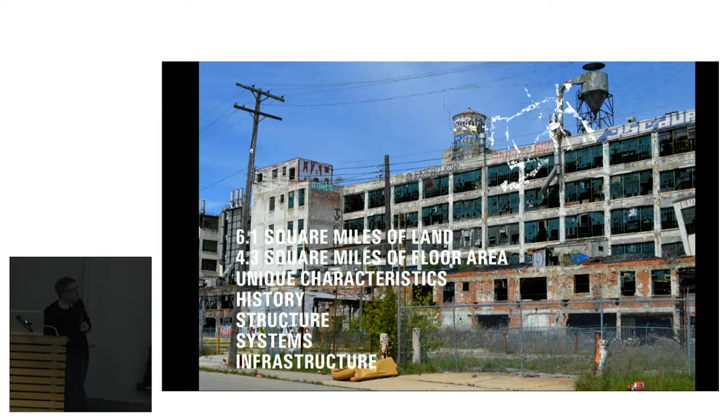6.1 square miles of vacant industrial land, 4.3 square miles of vacant floor area in these industrial buildings. These are huge, huge numbers. They have unique characteristics: incredibly robust structural systems, big water, big power. You can do a lot in these buildings, and people do a lot in these buildings. We need to get them more activated. The portfolio is massive, and we're just scratching the surface.

For us, when we look at projects like this—this is Packard, a portion of Packard—we have to think also about the proximity of these pieces to the neighborhoods around them. They're not just isolated out in some hinterland. People live by them and are often really impacted by them. And time matters. These places are kind of falling apart, but they are robust and they can do things.

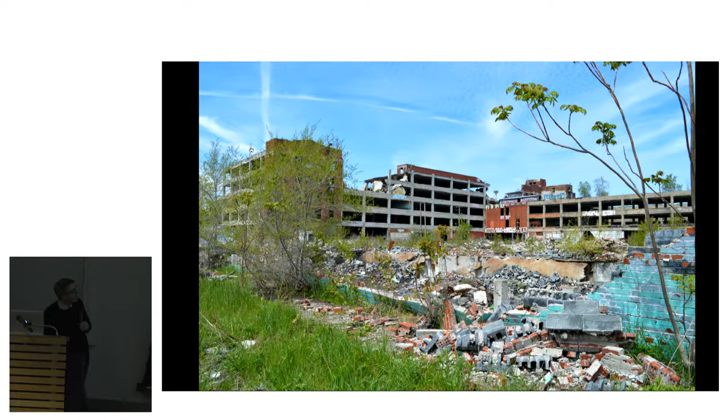These are some shots you know. This is the southern end of the Packard, which was taken down. This is all from stripping, because they cut out the steel structure. And people live right there. This is very close to where I took that photo.

And so to get there, we did some things like this competition with parallel projections. We garnered, I think, a little over 200 entries from 30 countries to re-envision the Packard, and to do it in a way that wasn't just projecting this high-end capital process of loft residential and all this stuff that is not only unlikely but really inappropriate given the amount of vacant housing stock the city has—it could exacerbate problems.

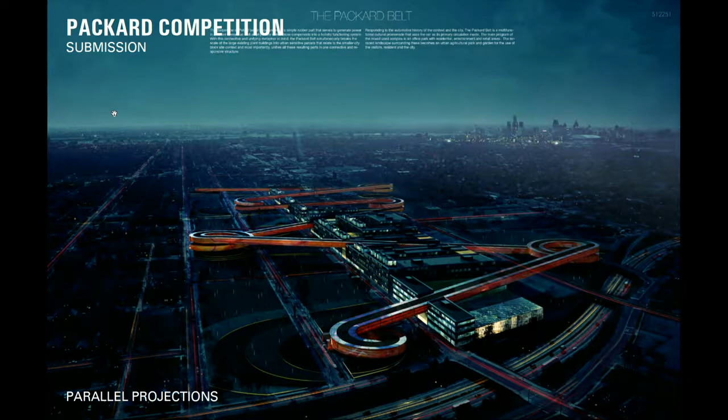So what do we do differently? How does it become part of renewable energy production? How does it become part of a kind of arts development? How does it become, I don't know, a driving gallery that you can drive through the building on? That's what this whole loop is about.

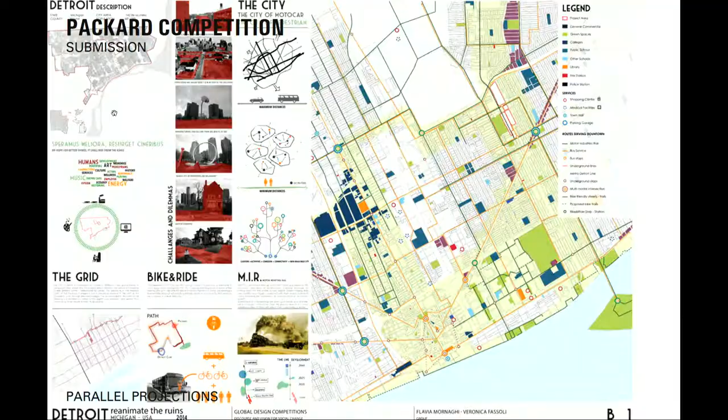We just think at times when we push on things that are rather straightforward, we also need to step back and really think differently about what's possible. We also bring the community in to see things. We all can look at the work and actually interject our own ideas.

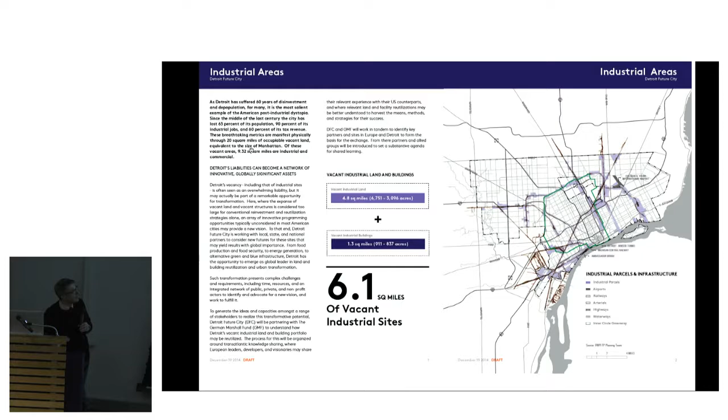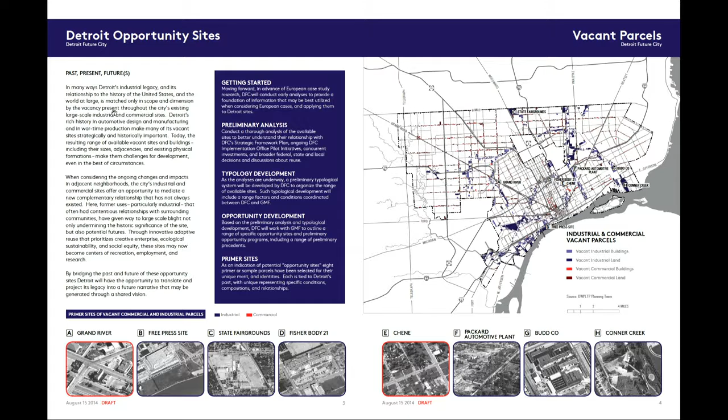We've also been working with the University of Michigan's Ross School of Business and others to develop new business models for these types of facilities, to understand what's possible. It's more than just reconceptualizing design all the time—we can create all these renderings, but how does it actually work?

A lot of people say, wait a minute, the history matters. They do. These factories—many of them contributed to Detroit's war production, over a third of the munitions and 100% of all war vehicles outside of tanks. It's also places of innovation, and they link back to other sites that we've been studying.

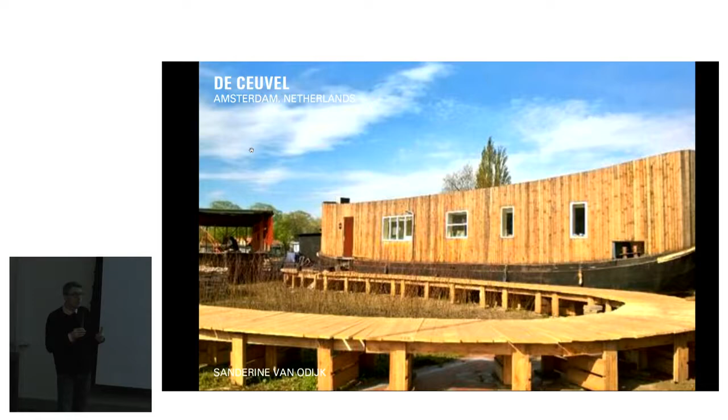It's a really amazing project, highly transportable to places like Detroit with low capital, and many of the places I was highlighting earlier in the presentation. It ends up being like the hotspot now in Amsterdam in the summer for parties—this is a cafe, and it's just crazy, a really incredible project. They're running a circular economy that actually puts money right back into the community, and the community helped them build it.

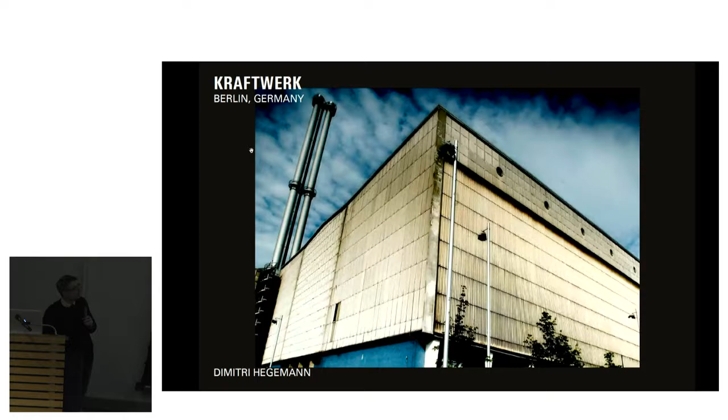There are, of course, other projects, big classic ones, like Dimitri's. This is the guy leading the Detroit-Berlin connection work, and this is an old power plant in Berlin. This is on the super sexy side—I wouldn't say this is top-down, but it's a little bit more robust. But this stuff can happen. We've got spaces like this, and we can do these things. In some cases, we've done them in the past—many of us, perhaps in the room, have done these things illegally in the past.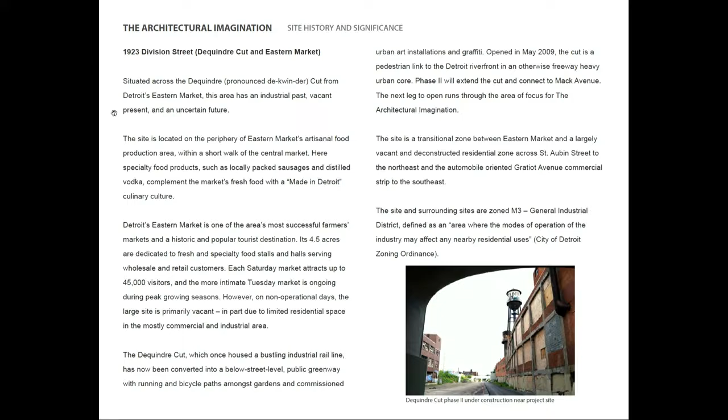This is one of the sites along the cut. And then the last one I want to share with you is this, as we round the corner to the finish line.

In some of the research I've been doing over the last 5 years, working with a lot of different groups around industry and former industrial buildings, it's led me to understand that we've got a bit of another crisis on our hands in the United States: our power system is changing, and it's changing rapidly, and we don't really think about that often. This has led me to a number of research initiatives tied back to those competitions I showed you, and it's also part of the studio I'm leading this term, a graduate design studio at University of Michigan called Power Prototype. It's the idea that what was past in power production could really be the future.

Over the last 25 years or so, the US has closed down 200 coal-fired plants across the country, representing 40% of the total supply of 523 coal-fired plants. We have other power plants of course, but these are just the coal ones. Many parts of the developed world are doing the same, and many places are actually far ahead of us. But as we do this, we have to realize that these plants, like this one in Michigan, actually sit on some of the most precious assets we have.

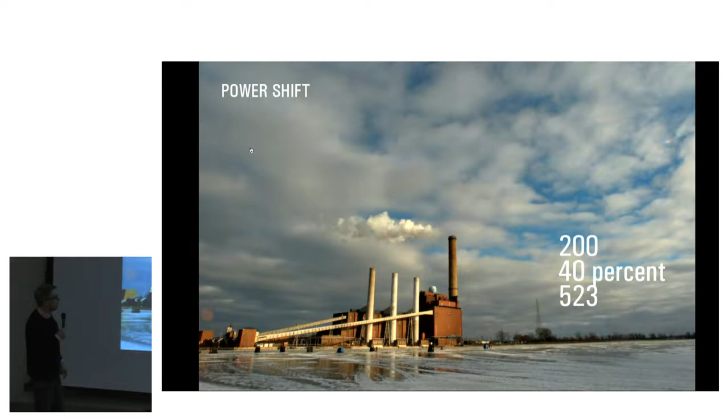Along, in the case of Michigan, our Great Lakes. They connect to urban areas in pretty big ways, and they're part of the economies that are there. To disconnect these things isn't just about turning off a dirty plant. It's about understanding how you actually recover the whole thing—the site, the access, everything.

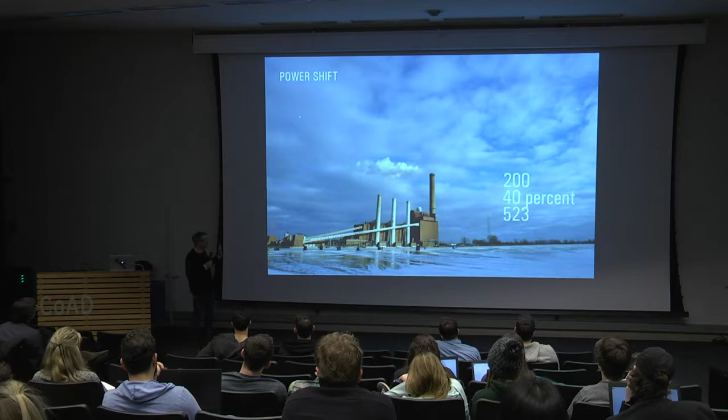For me, what do we do as architects in this space? How do we become part of this process? Because I can tell you right now, when these plants close, typically they all get knocked down, they all go away to a landfill, and most of these sites get brownfielded, meaning no one has access. So this isn't just about some kind of building-hugging activity to save buildings, but about thinking very carefully and strategically about how we deal with these issues, while actually providing people access to a natural resource, in many cases in neighborhoods that didn't have any access at all. This is certainly true in Detroit.

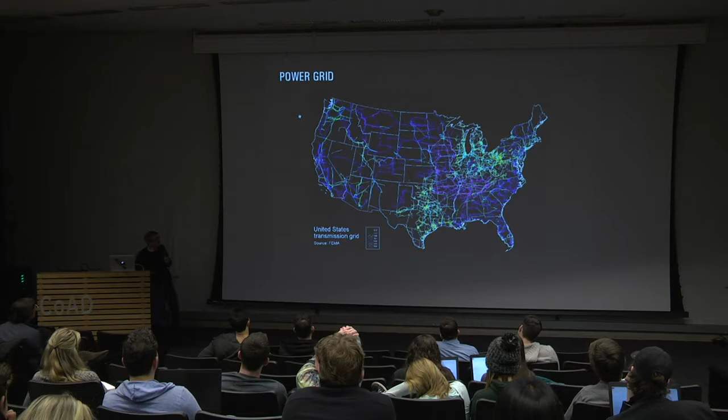If you think about the power grid in the United States and where these closures are concentrated, you just have to look at where the grid is today. It's not by chance that it's like this—these are the earlier industrialized areas with higher populations. These are also where we're seeing the power retirements, as the EPA calls them. The yellow ones are ripe for retirement, and you see them light up, many of them around us.

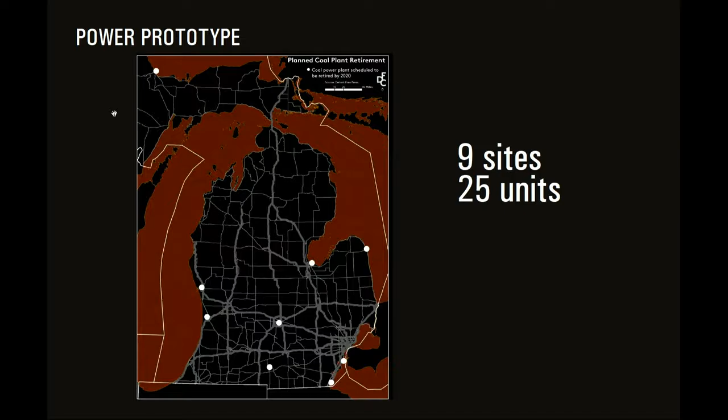Over the next 4 years, we're going to have 9 sites closing in Michigan. They're all up on the map right now—that'll be 25 power generating units. A lot of power going offline, but also a lot of power unneeded. Our economy changed; it's not the industrial economy it once was. Things are shifting, and cleaner power production facilities are in place. Coal is not good, so I'm not lamenting the loss of these plants, but rather drawing attention to what their future could be.

What do you do here where you have high levels of toxicity, precarious relationships with the environment around them, precarious relationships with the natural resources and the urbanized areas nearby? Where do we intervene as architects? How do we work with policymakers to make sure we hit these projects head-on, not from the backside?

And then how do we do that by looking at Conners Creek? This is a shot of one part of it, showing how these sites can be completely recomposed, and how we take advantage of this access and proximity to greater downtown. This is a shot from the top of a part of Conners Creek.

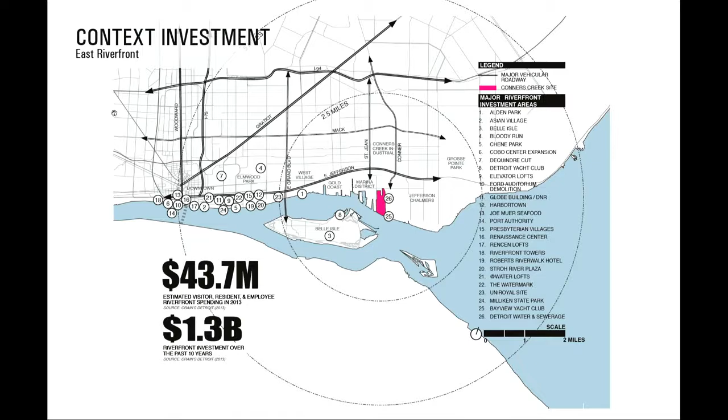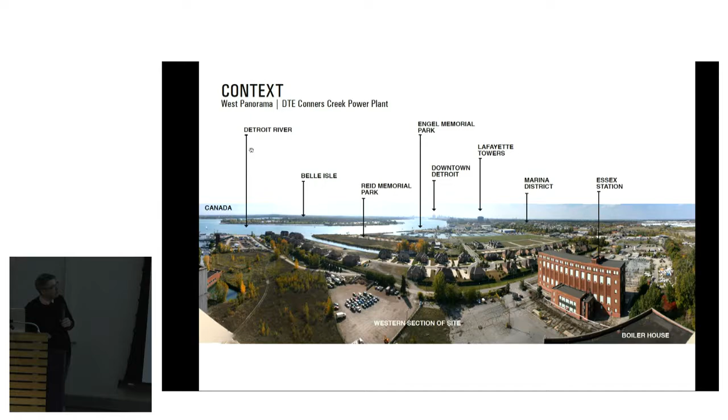And we understand how we garner and drive the investment that's happening along the riverfront at sites in the pink or purple there. How do we tie that together to make a connection to the immediate surroundings, which are crazy? They're McMansions and marinas and junkyards and train sheds and high voltage facilities and a wastewater treatment plant and a yacht club. It's like Mad Libs spewed out on the urban landscape.

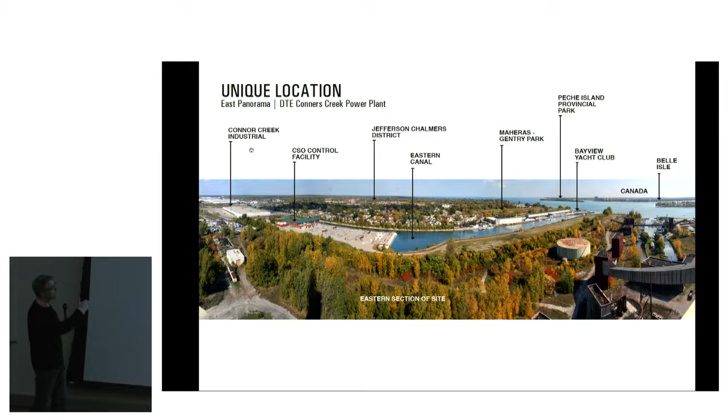And it's all there, and these spaces are a lot like this, right? They're kind of crazy. These are the spaces you put a bunch of stuff you never really wanted to deal with. It just happens to be right on an international waterfront, right at the throat of Lake St. Clair, a beautiful place to be.

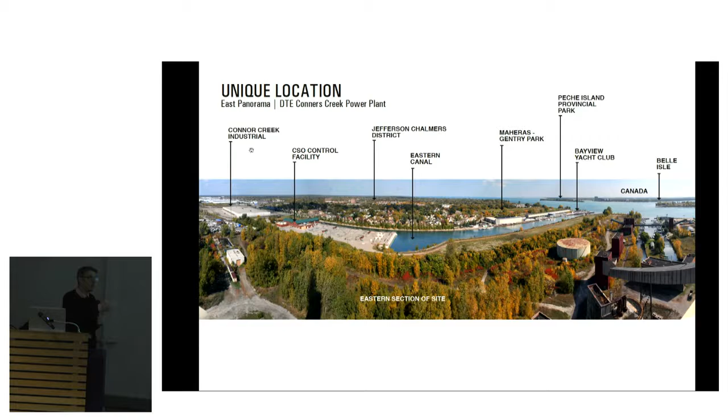So what do you do here differently? How do you do it also in a way that doesn't just become the procured space of the elite that wants to live on the waterfront, but rather a place that can actually employ Detroiters that need jobs, because that matters. So how do you take really cool stuff like this and think differently about it, retaining the history of it over time, which I'll spare you the details.

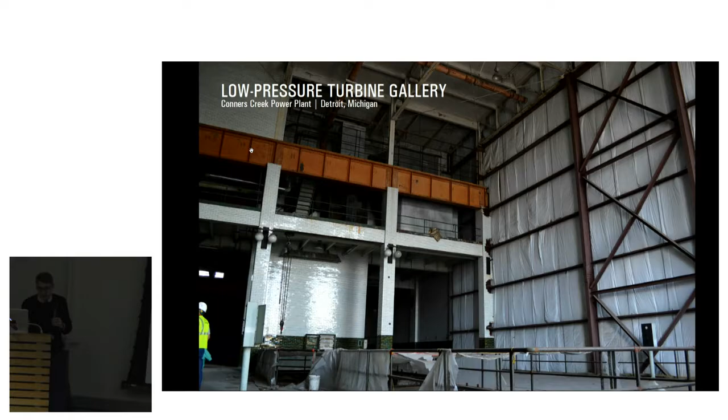And there's cool spaces. There's a high pressure turbine gallery, low pressure turbine gallery. The one left, this is the seventh of the Seven Sisters. If you knock down that temporary wall on the right side of the slide, you're about 30 feet above the river looking right over it.

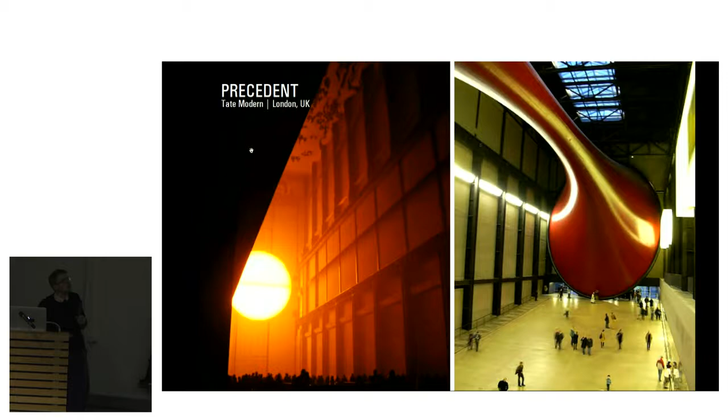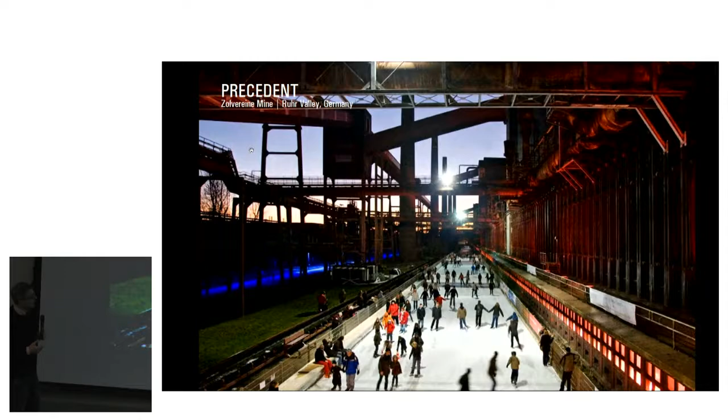And this is a space I recently visited. This is Zollverein in Germany, part of the UNESCO World Heritage Project, reclaiming part of the coking plant for a skating space. We can do things pretty powerfully here, and I think there's a lot of opportunities to do that in Detroit and other places.

The bottom line is, with everything I've shown you, I just feel like we have opportunities as architects to really step into a space and do things that we might not have thought we could do in the past to make some differences. So thank you.

Thank you, Dan. I think it's a great lecture, showing a range of works from different scales and complexities. We can take a few questions from the audience.